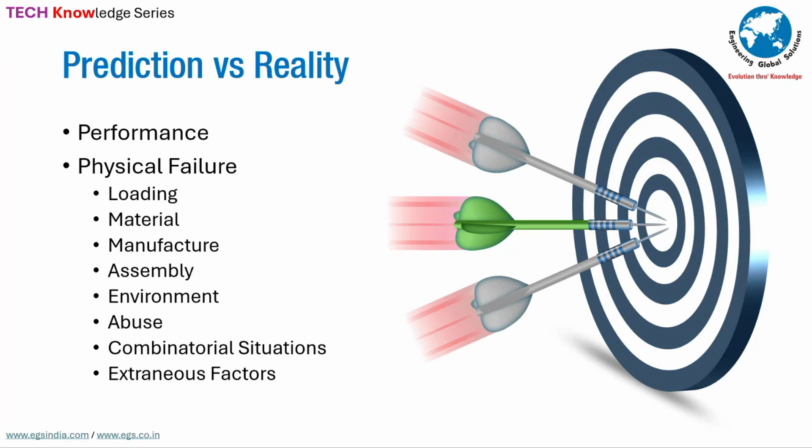So this presentation is more to do with how accurate your design is going to be to predict the performance and or the failure upfront, a priori, before the first prototype has been launched, not after the failure has occurred. Nevertheless, you can use the same concepts in a post-mortem or a posteriori activity, but it would be cheaper if this was done earlier up in the design phase than as a post-mortem.

Now let us take a look at an example. You are looking at the sheet metal subframe. For people who are not associated with the automotive sector, this is typically the product, the assembly on which the engine sits.

Okay, the integration of the suspension, the integration of the steering system, the lower control arms, the engines, everything comes on top of this subframe structure. Now, if I were to be asked to look at this structure in totality, and if I were to be the finite element analyst who is going to go about doing this analysis to predict accurately, what are the different things I would consider?

Other than the load cases that would come from the OEM or from the torture track or from previous database, the first thing I would be looking at is the stiffness. Second one is the strain state. I am not talking about the stress state here. Did you notice? It is the strain state. Why? Because stress is nothing but E epsilon, right? E is your elastic modulus. Elastic modulus is an approximation of the slope of the stress strain curve. I repeat, it's an approximation. So the strain is accurate while the stress has its noise in terms of the elastic modulus.

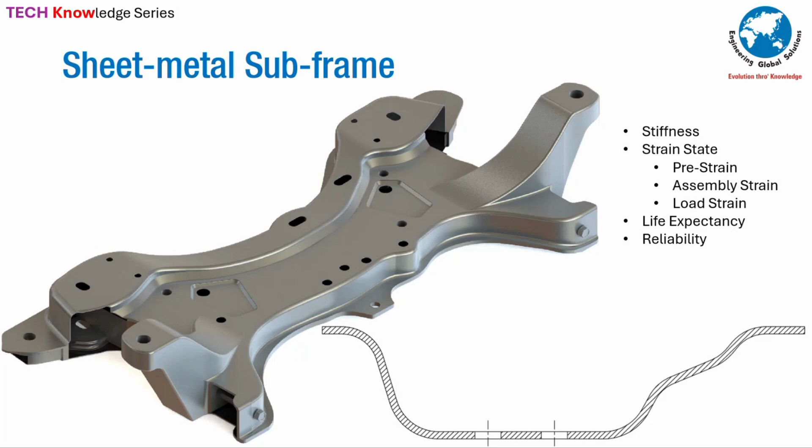So when we are doing these kinds of analysis, we need to look at the sheet metal thinning that would happen. A 10% thinning on a 3.4 millimeter thick plate brings down by 0.34, right? Which is 3.06. But you have done a nominal analysis with 3.4. So there are two stages that you need to look at.

One is the bought out raw material, 3.4 plus or minus 0.2, let us say. So 3.6 to 3.2. If 10% comes from 3.2 material fed in from that particular lot, imagine where you're going to be with the two stage. You will get shrink bands, you will get pre-stress states coming in and alarmingly saying that you are going to have problems, which means my section modulus has to be assured for all these variations that are going to come into picture a priori.

You may say that it is not the design's responsibility to do this. But if there is a failure, who is going to do the investigation and who is going to correct the drawings to ensure that this problem is mitigated? It is design. Might as well do it before it arises, as a part of the process.

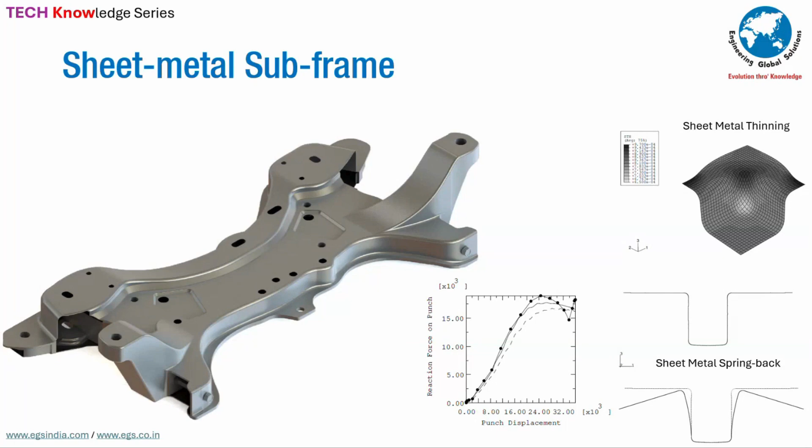So when we take a holistic look at any particular component that is going into the assembly, we need to capture the state of stress when it starts performing, with two combinations coming in: one inherited as a result of the manufacturing and assembly process, the other as a result of your loading conditions.

Now, if we are to do the subframe FEA verification, you would have a static analysis, a fatigue analysis, an NVH vibration acoustics analysis, a crash analysis on impact, and topological analysis in terms of optimization. These are the different things that we look at. How accurate are our procedures? How accurate are our results? How accurate is the interpretation of the results in every one of those silos? Remember, each one of them is interconnected, though they have been shown as different islands.

So if you take the pre-stress coming in the 7th, the joint weld and integrity coming in the 6th, the thermal and corrosion part which comes subsequently down the line, we have a whole new picture emerging. So when a finite element analyst is looking at the design, he or she has to consider how that part is going to be in the assembly, or how a sub-assembly is going to be in the main assembly, look at the gyrations it would go through and predict the durability based on that, thereby enhancing the confidence in terms of reliability.

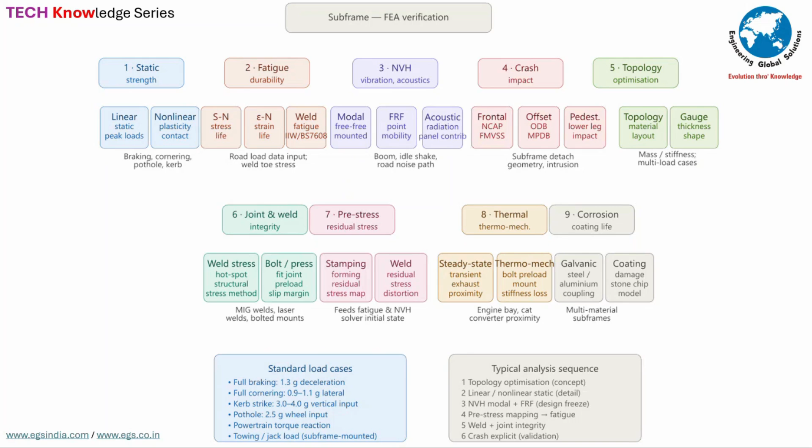If you want to reduce the cost of ownership of the customer, if you want to reduce the cost of quality for yourself, obviously this process has to be standardized so that the accuracy improves multifold. The models we are showing in this presentation are generic models. They are not customer models. So you can be rest assured that the customer confidentiality is not being exposed, because we are covered by customer confidentiality. This is an interesting problem that I would like you to look at.

You have a rim which goes through a rolling process. So there is a pre-stress state coming into picture, a pre-strain state already inherited. Then you have the disc which is stamped into position. Then the rim and the disc have an interference. They are assembled together and then they are welded together to form the disc wheel, right? So what are the things that we are looking at?

We are looking at the stiffness. Stiffness during what? Lab stiffness, stiffness during operation. If it is stiffness during operation, the next question I will ask you is, have you considered spinning stiffness? When the object spins, the stiffness changes. Spin softening takes place. Have you considered it?

So the stiffness, it would vary as a result of what? Thinning. It would vary as a result of what? The profile that you have given, profile tolerance. It would vary as a result of what? The grain of the material. Sir, elastic modulus is what we are looking at, sir. But percentage elongation? The strain energy under the curve? You are saying. I am asking you to look at it one step further.

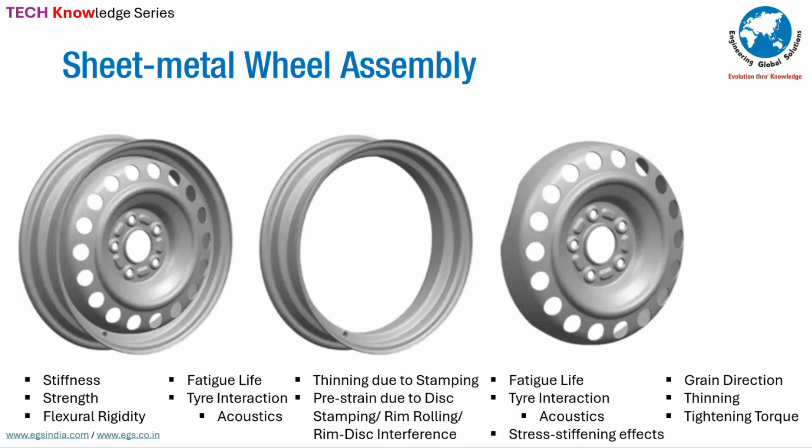That is where we learn how the system operates. So you look at all the different aspects of it, put it together, as the sheet metal would have finally landed up as a wheel. You take this component through the manufacturing process on the digital simulation side, and then you look at the predictive life cycle of this. This example I have shown you only because all the different aspects of manufacturing which influence the fatigue life need to be taken into consideration by design.

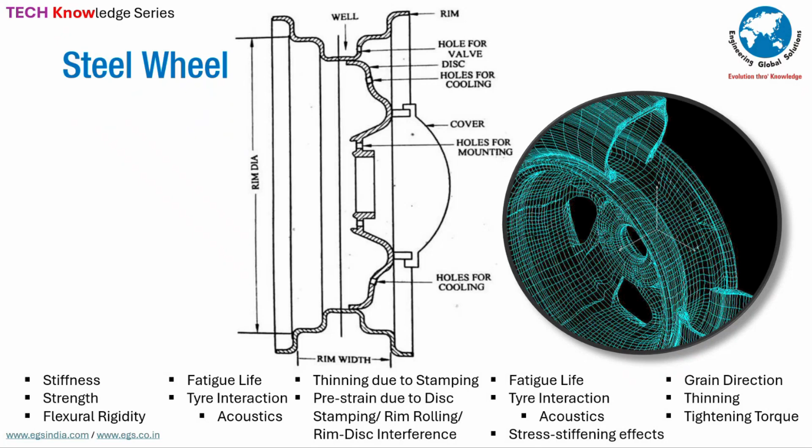You cannot apply arbitrarily a 10% thinning on the model and run the analysis. That would mess up the durability quite a bit in terms of the stiffness and in terms of the node and anti-node positioning on the disc and the rim. You cannot do that. The fixity will get into problems.

Now, the next example. Till now we talked about stiffness, static stiffness. Now we are talking about dynamic stiffness. In a mount, you need to look at the dynamic stiffness. You do the point mobility studies. You look at the directional mobility and you look at the target stiffness versus the actual part stiffness versus the FEA response, frequency response function. This needs to be looked at.

Years ago, we did a project for a company which had 7 manufacturing locations worldwide. We took 13 of their mounts, redesigned those mounts, revalidated them and did the optimization of those mounts. Today, you have the capability to do shape optimization inside finite elements. Now, artificial intelligence is breathing down the neck again. So the day is not far off when AI tools start giving you optimized things which don't make sense when it comes to looking at the topology. Abstract modeling, that kind of thing.

So the elastomer steel bonding, why is it required? The shear in that area, if it rips open, your mount is gone. So the aging considerations, the manufacturing pre-stress, the assembly pre-stress when you are bolting it together, this changes the frequency completely.

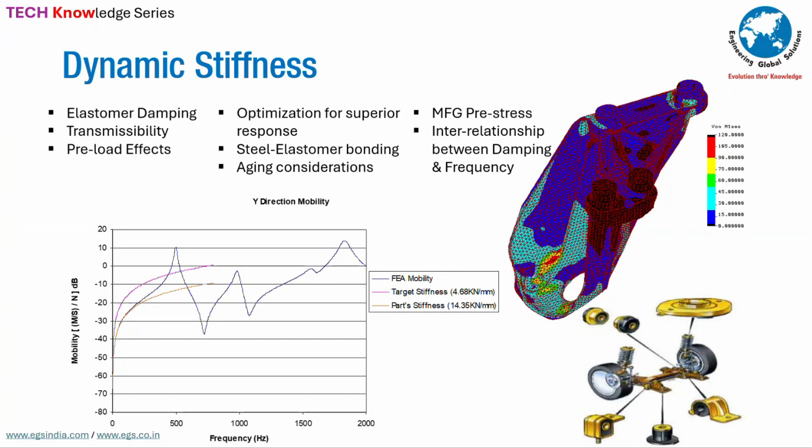Now take a look at this picture. You will see a reactor column sitting. If I look at this, I will throw tantrums, but this is how typically petrochemical units are. Now, we had a condition wherein we had to look at the external disturbances, internal disturbances, and the combination of external and internal disturbances that would wreak havoc. For example, the person who did the finite element analysis here forgot to look at it as a system and did only tube bundle vibration according to a manual calculation and then a small FEA with beam analysis.

When you look at the complete system, the tube bundles which are rotating started failing. Here, the requirement is temperature and displacement. Now remember, in conventional finite element analysis, you take displacement as the unknown variable, right? From there, you get your strain field and then the stress state. That's the displacement based finite element method. Then you have the single degree of freedom called temperature. You go through the conduction, convection, and radiation equations, heat balance, and you solve the problem separately.

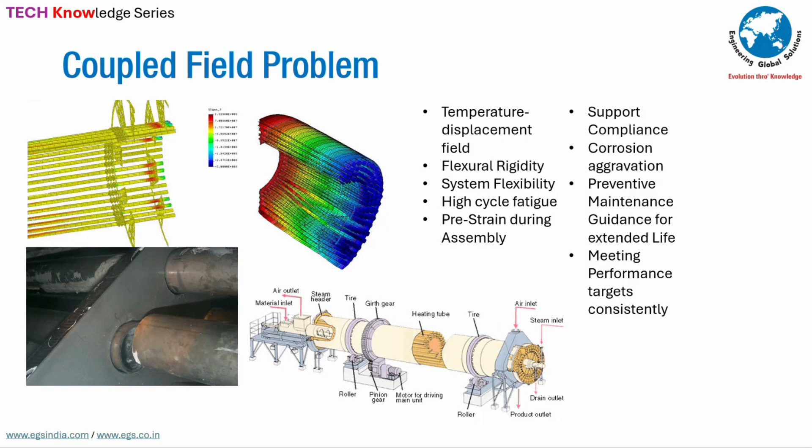So let us take the example of a simple drop arm which is used in the steering of a car. Single part. I am taking a single part because I want you to understand that it is a part of a system. And when it is a part of the system, the component cannot be divorced from the system. And you need to do a system analysis, not a part analysis.

How do I force this? Look at the DFMEA. You put the DFMEA in place, you start looking at what can go wrong with the design. Look at the severity, the occurrence, and the detection, and then you do the mitigation saying, I have already done the finite element analysis of this. I have taken this into consideration. So now the accuracy of your prediction is enhancing.

Primarily, you are going to look at all the failure modes as documented and also look at the cross correlation between the different failure modes. That is important.

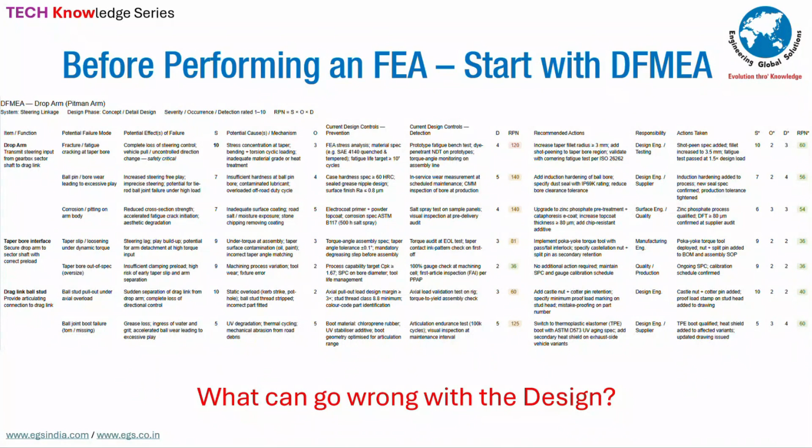So once you bring in the design FMEA, what can go wrong with the design, and you do the analysis for every one of those DFMEA items as required, then you link it with the process FMEA and you start looking at how you are going to reduce the thinning, how you are going to reduce the pre-stress coming as a result of the forging operations or the bending operations or whatever it is. Are we going to do a stress annealing? Is it really required? Justify it. Now you start predicting with even better accuracy.

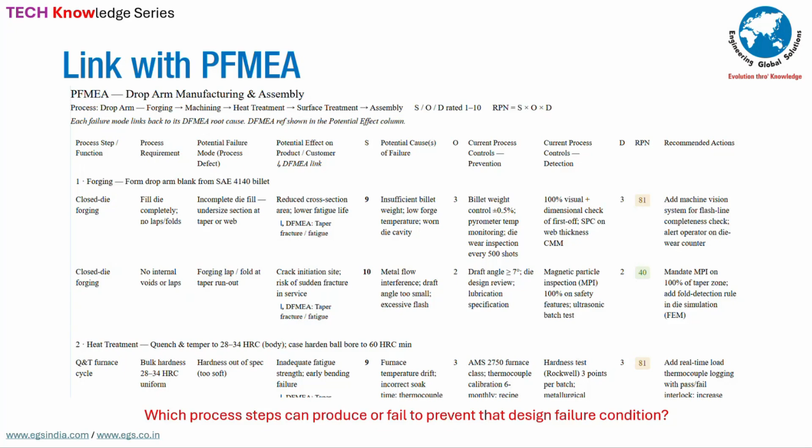And then which process can lead to or fail to prevent the design failure condition that we looked at? Have we mitigated all those? Then the third FMEA is service FMEA. Normally we look at only two, folks. Please look at the service FMEA as well.

Now in this particular example, what does it say? Inspection of the boot seal condition. Why? Because the lubrication is happening because of that. The teeth failure will happen because of lack of lubrication. Lack of lubrication because of the boot getting punctured. The boot getting punctured because it was stretched in the articulation.

It was stretched in articulation because of what? Because of the elastomer getting into position and the crimping that took place prior to that. And the crimping led to a pre-strain, leading to a boot strain, leading to a lubrication problem. You are supplying the unit as an assembly. You are getting the boot from the supplier, but you are assembling it. Your drop arm is your assembly.

Now who gets blamed? So unless we get the pre-strain conditions, somewhere we have to start. Incrementally go through every one of these pre-stress conditions and then put it together. Remember, when we come to the office early in the morning, we are in a pre-stressed state.

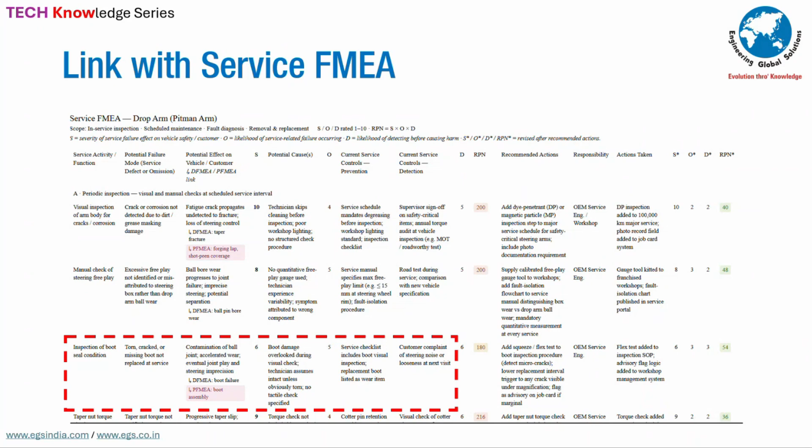Depends on how we slept, right? Every day. Similarly, our objects also go through the same conditions. It is only by building a painstaking predictive reliability model that we can say that the accurate state of stress has been predicted by us, so that the prototype testing can be few and far between.

So the setup for FEA is based on the severity, occurrence, and detection in the FMEA. In this particular case, again flexural rigidity. Then the life calculations for the LMC condition, least material condition. We always do it for the nominal, right? Based on multi-axial fatigue, because the component is bending in two planes, not in uniaxial fatigue.

Then the spline wear, then the drop arm permanent deformation because of the limit load, then introducing the material orthotropy in terms of the grain direction, then pre-strain due to forging and the heat treatment, and wear in the conical ball joint area, especially because the ball joint gets pre-stressed, getting into compressive stresses over there. Then obviously corrosion, effect of inadequate pre-tightening torque.

We did have a drop arm calculation wherein one of our customers asked us, this drop arm, can you please predict and tell me whether it failed because of lack of pre-loading or because of a torture track issue. So we did the analysis both ways and we said it is not because of preloading, it is because of the cross-sectional modulus. And in this torture test track, between this cycle and this cycle, the truck would have this component, this particular area, the crack would happen. They were shocked. We predicted it. They came back and said, how did you do this? This is the process.

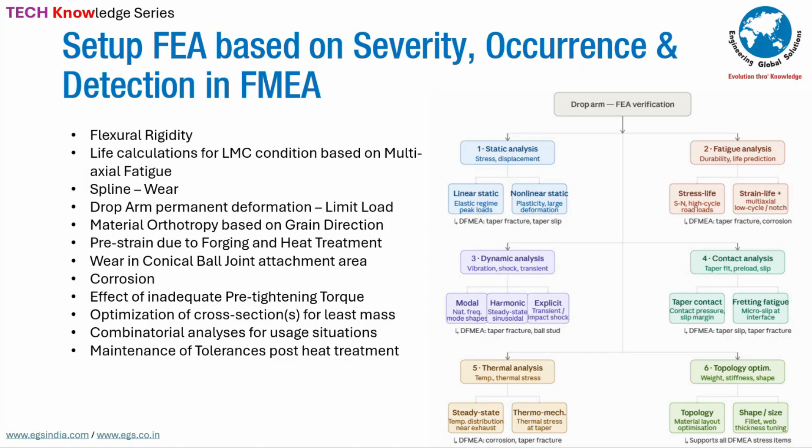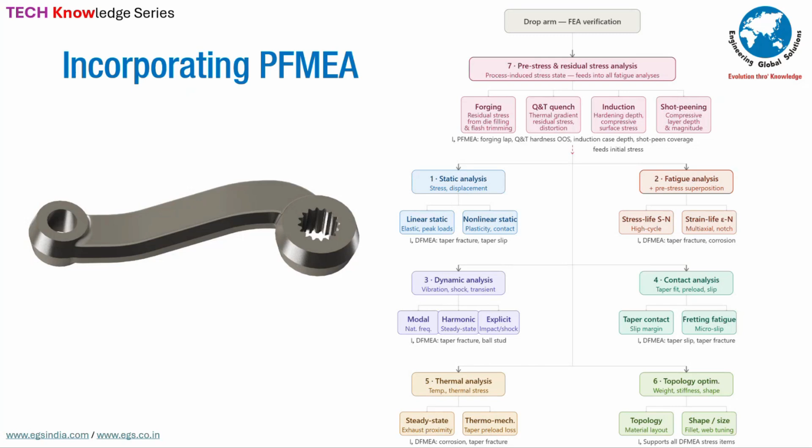So incorporating the PFMEA, you put it upfront, residual analysis, forging, quenching and tempering, induction, and then shot peening. You put that together and then you do all your analysis inside. Your inherited stress state comes in. It gives you a better picture. So in summary, the accuracy in finite element depends on how good we are in capturing the failure modes and linking it across design, process, and service. That's where your FMEA comes into picture.

Emphasis on system level analysis, not component level analysis. Why? Because it is energy. The concept of Newtonian statics is gone. It's dead. Continuous system requires Lagrangian approach. That's what finite element gives you. So energy approach. Establishing correlation between variables to ensure the nature of independence. Severity analysis for combinatorial factors.

Assessing invisible life-threatening factors. Factoring the material variation in terms of grain direction, in terms of non-metallic inclusion, things like that. Incorporating what-if scenarios involving process and service failures, and then considering piece part variations due to tolerances and the process health. All this, when we put together, your accuracy comes close to the bullseye. The benefit of this is enhanced durability, improved reliability, increased customer satisfaction, reduced cost of quality, unparalleled reputation for your product, technology, and your company.